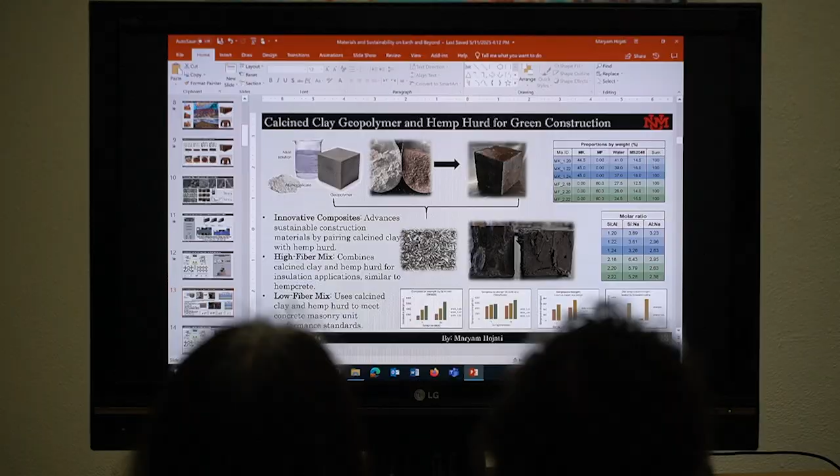One of them was with the use of hemp. So we mix hemp and geopolymer. We make material which is structurally sound and load-bearing. On the other side, it has high insulation properties because we are using hemp material.

We additionally use geopolymer material when it comes to construction for lunar application. Another part of the research that we are using, we use the lunar regolith or native lunar soil. We try to adapt it for construction and making some construction material with those lunar regoliths. Currently we have some NASA project going on with Artemis team to bring some of the material from moon, and this is the part of the research that we are doing, and geopolymer would be the only option that we have to make construction material for lunar purposes.

We have some asteroid project. We are working on mechanical property of asteroids, so we try to make some asteroid material in the labs, and then we characterize its mechanical property. This is another NASA project that currently I'm doing at UNM.

Another project which is very interesting is about how we can jointlessly connect a structural material like geopolymer that I showed in the previous slide to transparent material like glass. This joint is very strong and prevents any energy loss from the joint. So this is another project that I started. It's functionally graded material where we need it to be transparent, we have the glass, and when we need the load-bearing material, we have the geopolymer, as you can see in this slide.

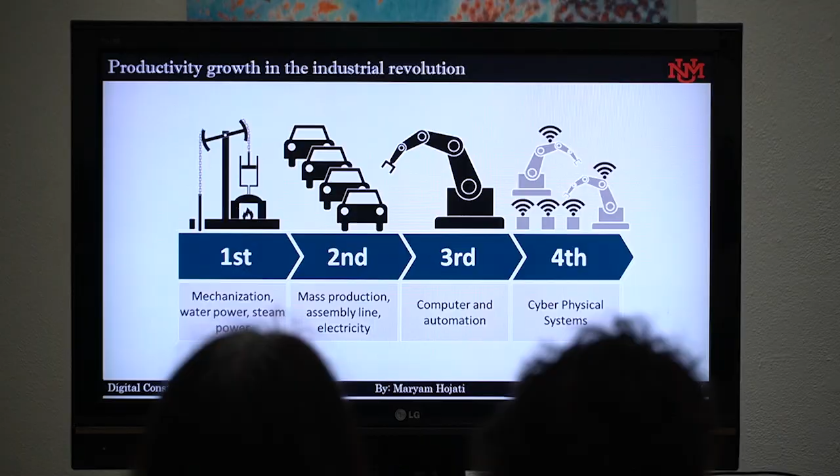and assembly lines. The third industrial revolution was the computer and automation, which started about 50 years ago. And currently we are living in the fourth industrial revolution, what is called Industry 4.0. It's all about smart factories, where all of the systems are connected, augmented with web connectivity, and connected to a central system that could visualize the whole production chain and make its own decisions. This is what we call cyber-physical systems or the Internet of Things that you might hear about in the new era of industrial revolution.

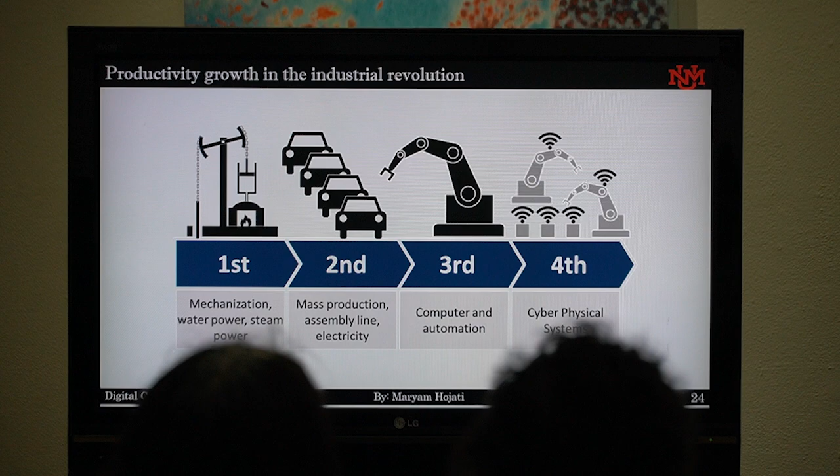And there are some rumors that we are about to move to the fifth industrial revolution with the new advancements in AI, machine learning, and everything. But all of these industrial revolutions transformed the economy, which was based on agriculture and handicraft, to the new industry, which is mainly based on big factories or systems that could achieve larger production of goods. So considering all of this digital revolution, if the construction industry tries to adapt some of them, it could address the low productivity issue, the slow production, to have faster construction, address the cost, and also address the low quality of the work.

And 3D printing is one of the outcomes of the third industrial revolution and has high potential to change the way we construct nowadays in the construction industry. 3D printing is all about how we can make any three-dimensional object from a digital file. And it has been growing in popularity in different industries, including the food industry, aerospace, and bioprinting. In the next slide, I'm going to very quickly review some of the advancements in different industries in terms of the adoption of 3D printing.

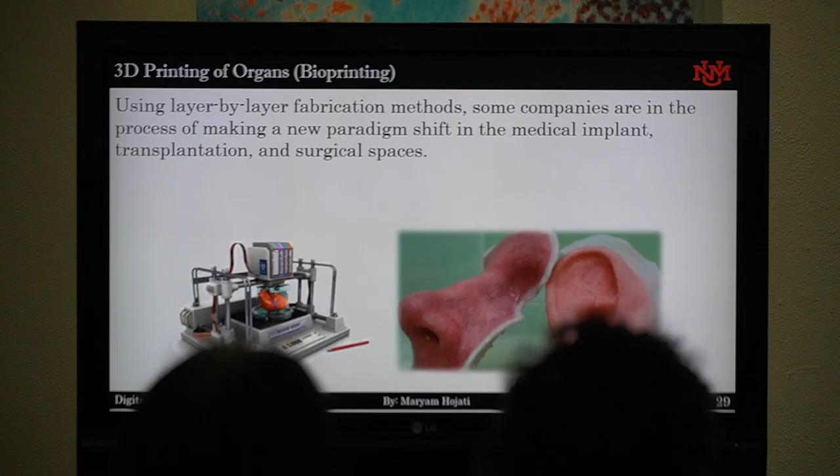So I'm going to quickly review some of the applications of 3D printing. One of the major applications is bioprinting. 30 years ago, when 3D printing started to grow, bioprinting was one of the major industries that adapted and tried to 3D print different organs or body parts using this new technology. They used living cells to 3D print different parts of the body. Dentists are also embracing 3D printed goods rapidly. Some dentists currently have a small printer in their office, and very quickly they make all of the pieces the customer needs.

Some fancy restaurants also started using it to make different forms of noodles. There are some in California that I recently visited that use this new technology to attract more customers.

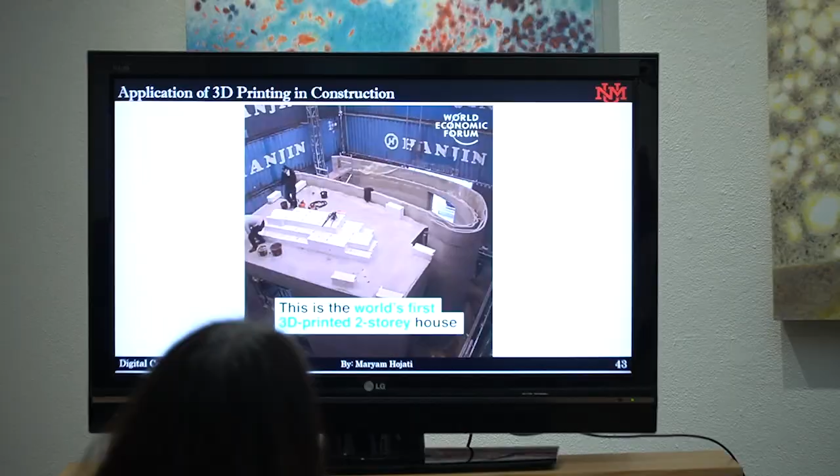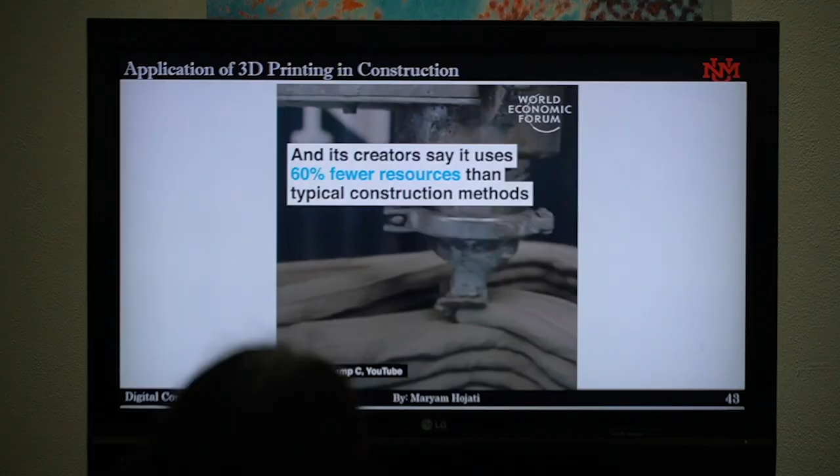This is one example of 3D printing 2-story houses in Belgium, and they started this project, I guess, 3 years ago, and they finished this project in just 2 weeks, 15 days. It's very fast. They said they use 60% less construction materials. They emit 50% less carbon dioxide, with 3 times stronger material because their material was engineered. They just have one person needed to monitor the entire construction process, and it was designed for a 2-story building.

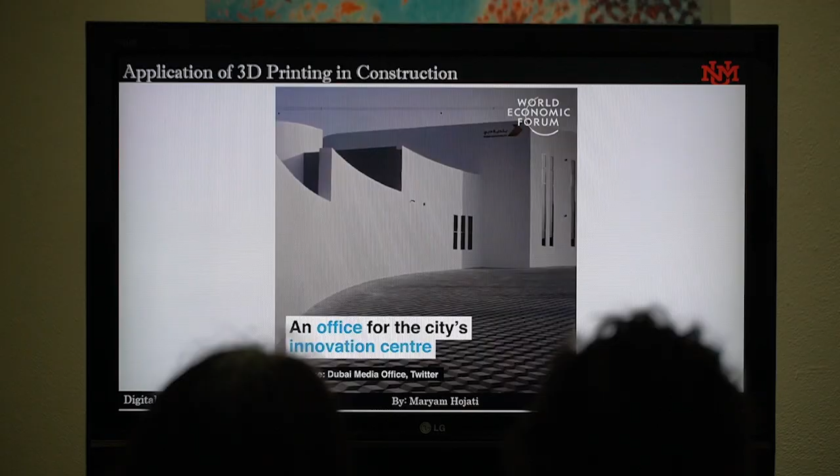We have also some other examples. This is one of the centers in Dubai; the innovation center was 3D printed by one US-based company, Apis Cor, and their plan is that by the end of 2030, they're going to finish the 3D printing of the entire center by use of the new technology. In France, there is a neighborhood that they try to 3D print for low-income and homeless people by use of this new technology, with the idea that it ends in lower cost and more affordable houses.

And in the US, as I mentioned, ICON also makes 60 family affordable houses in Mexico. So ICON is a US-based company, but they did it in Mexico, and currently in Austin, they are 3D printing a complete neighborhood.

So other than 3D printing of houses, there are also some applications for infrastructure, like the wind turbine tower. Previously, the wind turbine tower was up to 100 meters in height, but by use of new technology, we can achieve higher heights, like 200 meters, capture stronger wind currents, and generate more energy from the wind turbine. And this is one of the examples, again in Europe, where they try to simulate the 3D printing of one of those wind turbines in the lab.

So as I mentioned, the last item that I have here is all about the application of 3D printing for colonizing space. And this is the last part of my presentation, where I'm going to review one of the NASA projects that I did during my PhD and postdoc at Penn State University a few years ago. So space colonization has been argued for so many years. There are so many arguments against and in favor of space colonization.

Those who are supporting space colonization have 2 major causes. One of them would be survival of the human race because of some man-made or natural disaster that might happen, who knows, and availability of more material and resources when it comes to space. Professor Hawking predicted that the human race, the way that we are living nowadays, would become extinct within the next 1,000 years. Yes, 1,000 is a lot, but it would happen if we consume all of the natural resources that we currently have on the Earth.

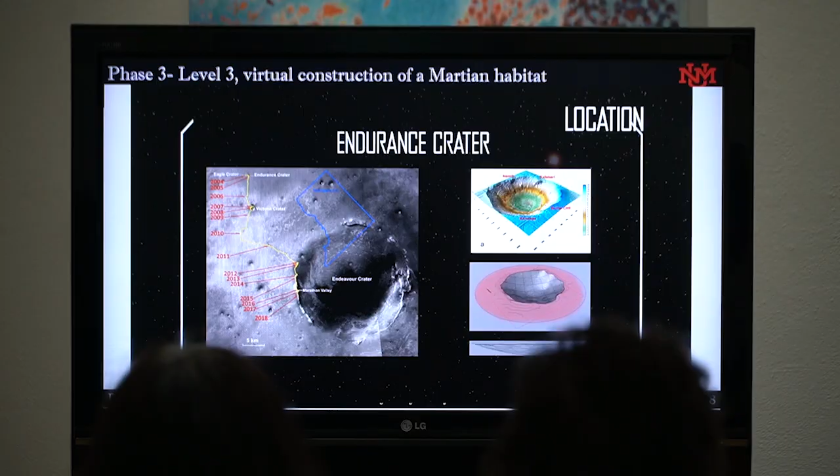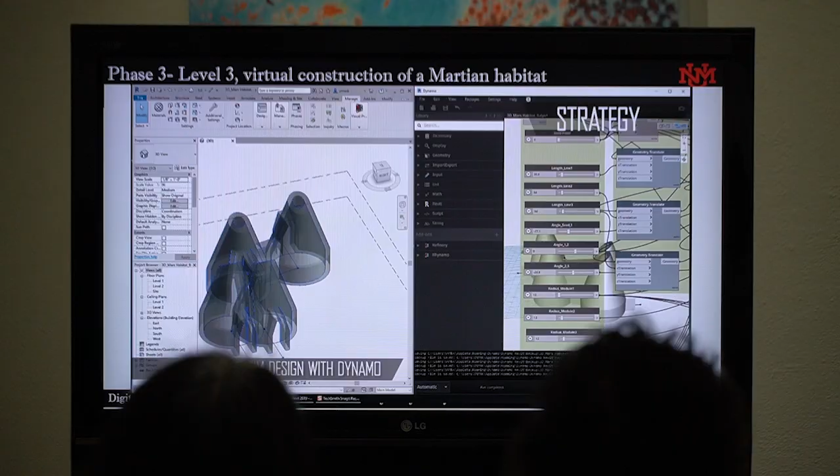Conditions on Mars are inhospitable and pose big challenges to human life. Because of the expense and limitations of space travel, we will need to maximize the use of indigenous materials and resources. Our strategy builds on our current research to develop low-cost housing on Earth using parametric BIM design and additive manufacturing. The construction process involves a robotic arm printing a geopolymer concrete mixture called Mars-crete.

Mars-crete consists of indigenous minerals, including basalt, which is crushed and used as aggregate. Kaolin has to be calcined to obtain metakaolin, which is used as binder, and sodium and silicon compounds, which are used as agents to activate metakaolin with water obtained from ice. We understand the hydration reaction without gravity by studying the solidification of concrete aboard the International Space Station.

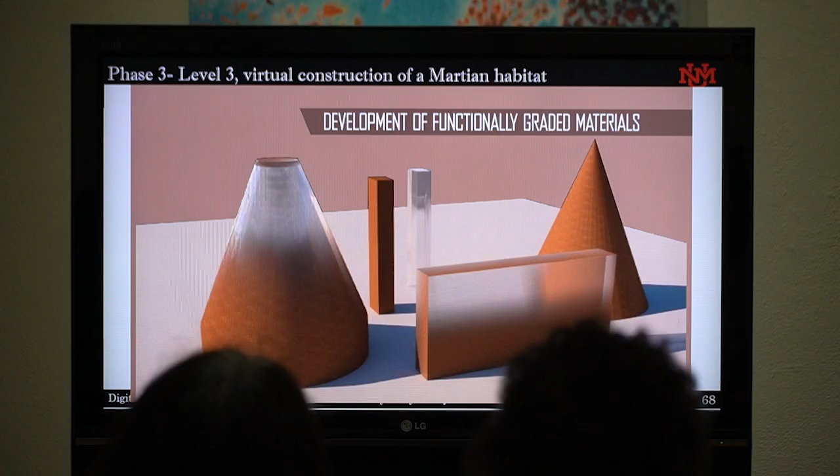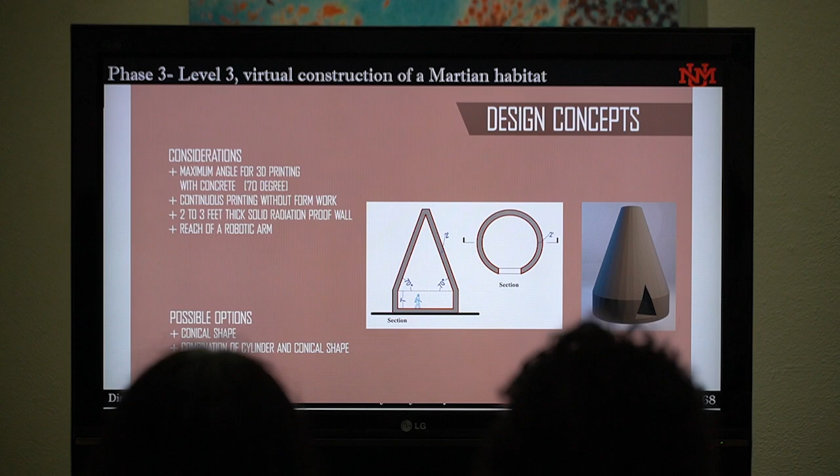The design concept considers the maximum angle that can be printed without formwork, the minimum wall thickness required to protect from radiation, the maximum reach of a robotic arm, and structural stability. The result is a basic unit formed by a cylinder and a cone. The finite element analysis considered the principal tensile and compressive strength, considering the interior of the building will be pressurized.

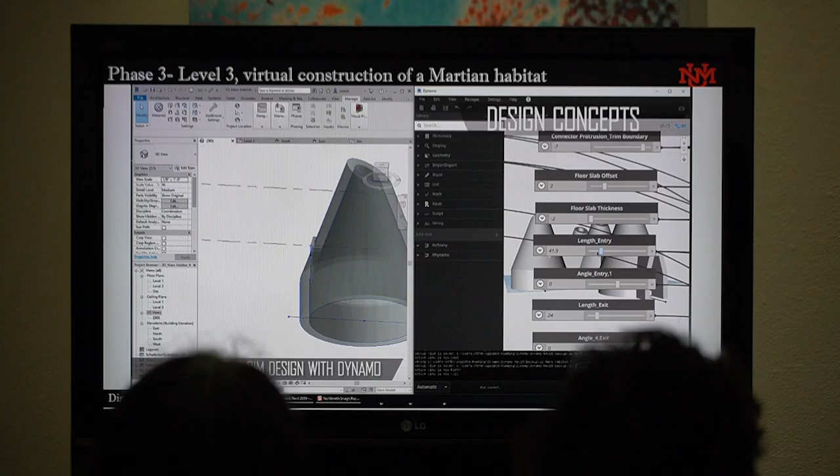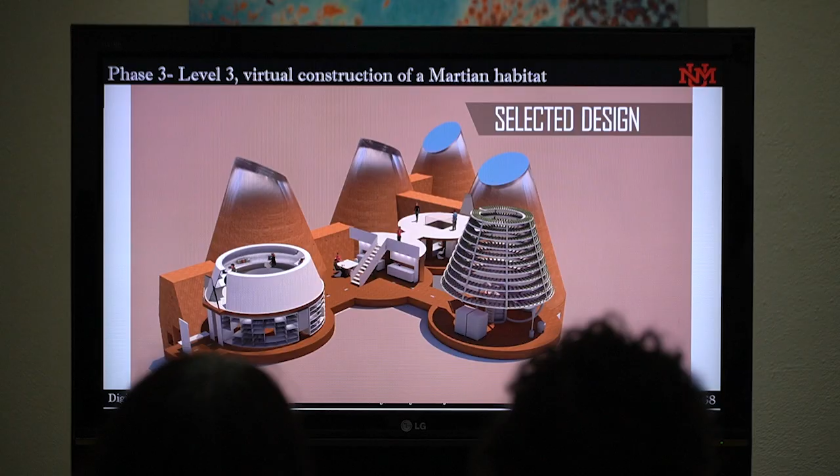This conic unit can have varying sizes and be connected and combined in different ways to obtain different shelter configurations, adjusted to different programmatic requirements and specific site conditions. These principles guarantee expandability as more units are added to the original design. Among multiple possible design options, we chose one to illustrate our concept. Each unit is composed of a protective shell made from indigenous geopolymer concrete and a lighter interior constructed from both indigenous geopolymer and recycled plastics with 2 floors.

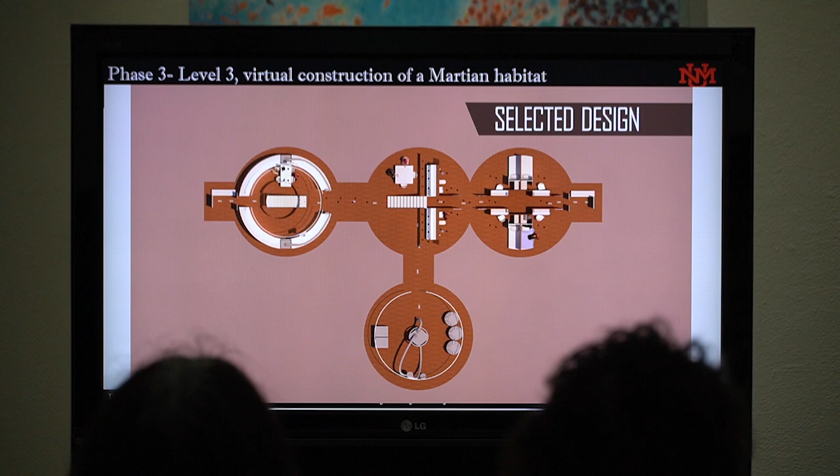By manipulating the seamless transition from geopolymer to glass, we can provide 2 types of openings. From above, giving each unit ambience lighting, and from sideways, allowing for views towards the Martian landscape. There are 4 units for work, living, sleeping, and gardening. Entry chambers on each end of the habitat enable access from the exterior and emergency exits. The first unit includes a wet lab, meeting area, and storage on the first floor, and individual workspaces on the second floor. These 2 different workspaces are articulated by a staircase.

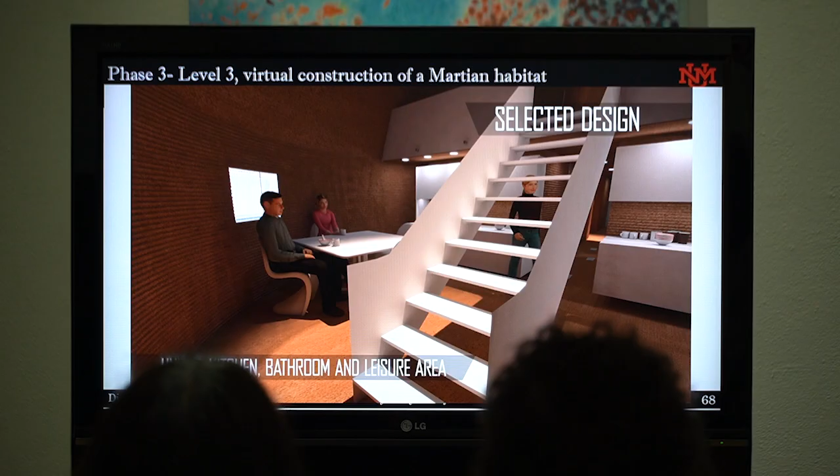The second unit hosts the dining area, the kitchen, and bathrooms on the first floor, and a leisure area on the second floor, accessed by a second staircase. The third unit includes the sleeping quarters on the first floor and workout and leisure areas on the second floor. The design was conceived to enable visual communication between the various units and floors, thereby offering a spatially rich living environment. The fourth unit contains life support and hydroponic systems with provisions for emergency situations.

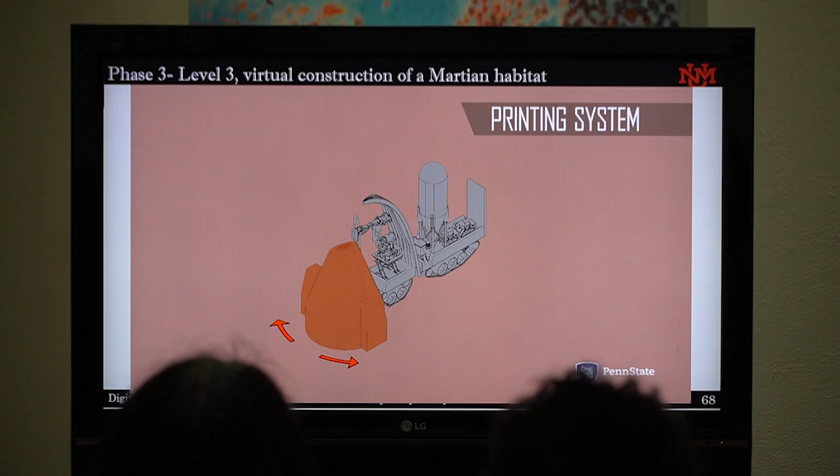Each unit can be sealed and will have life support capability during repairs. The printing system is mounted on a rover. It includes a retractable dome that guarantees proper conditions for printing. Once one module is constructed, the rover moves to print the next module.

This strategy will enable the creation and growth of thriving human colonies on Mars. Colonizing space. So in the next stage, they asked us to 3D print the small scale habitat in the Caterpillar Center that I showed you the picture of in the first few slides. So to do that, we have a smaller scale of the habitat that we designed in the virtual case,